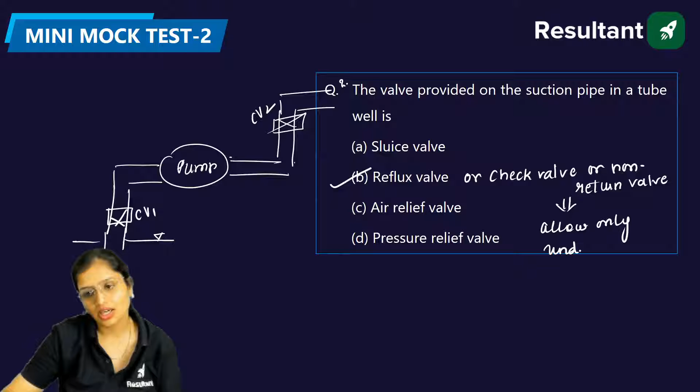So you provided the valve on the suction side. If the same question had the delivery side instead, and they asked about the valve provided on the delivery side, in any pump cases, we still provide a check valve because we don't want the water to move in the backward direction.

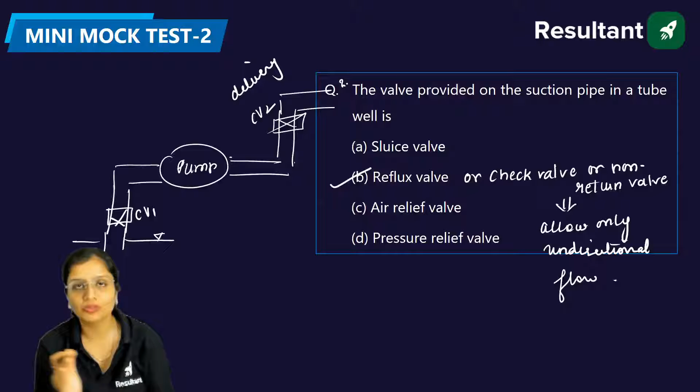Clear? Now question number 3. A scour valve, which you call the drain valve or blow off valve. Where is it provided, guys? Where do you provide it? Where do you provide scour valves? You call it drain valve, you call it blow off valve.

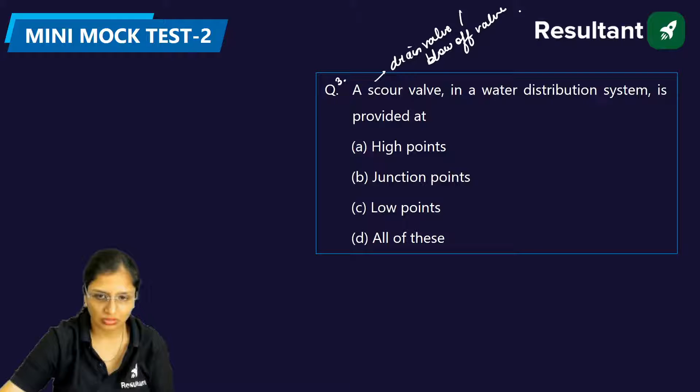Yeah, I'll send it. Send. Actually, I was busy with too many classes. I'll send it. Come on, calculate this.

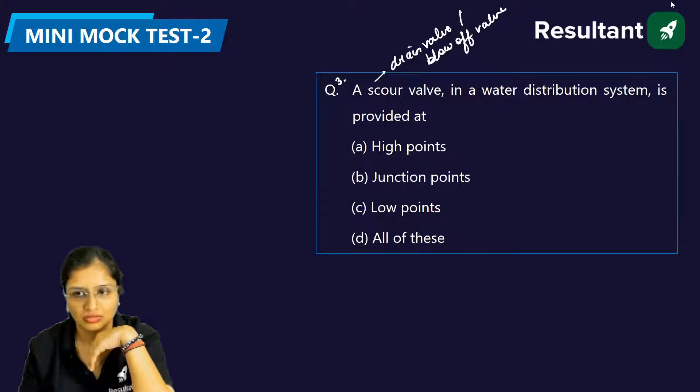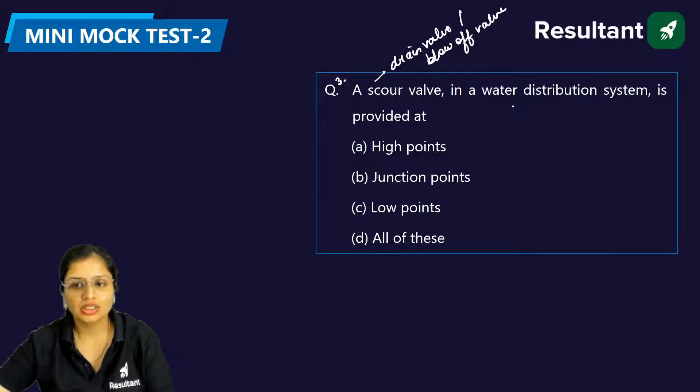A scour valve is provided at the low points of the pipes. Junctions mein kabhi provide nahi karte, you provide it at low points. Why? Because first of all, these are manually operated, and from time to time when cleaning of the pipes is required, you will open these valves. So the water will be flowing under the action of its own weight from both sides, and they will carry the suspended solids. You will open this drain valve, and the water along with the suspended solids will go out of the pipe. So the water carries the suspended solids deposited in the pipe, which is why you place it at the lowermost point.

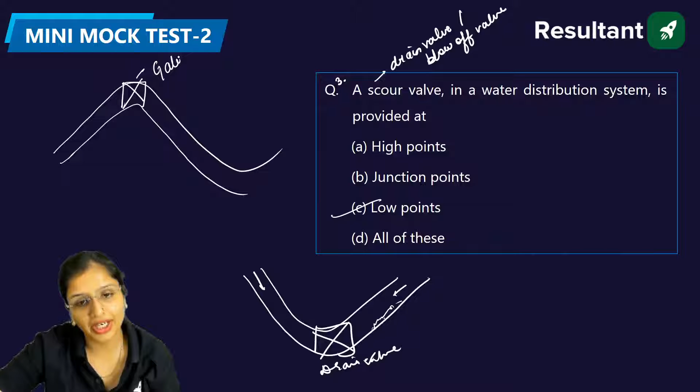So, low points. Now, one more thing about this question, gate valve. If they haven't asked about gate valve, I'm still telling you — you call it gate valve or sluice valve, and it is provided at the summit points. If they ask about gate valve, which is used to regulate the flow of water, you provide it at the summit points. And drain valves, you provide at low points. Clear?

Pakka sure, 100%. 100%. Vishnu, let's check it out.

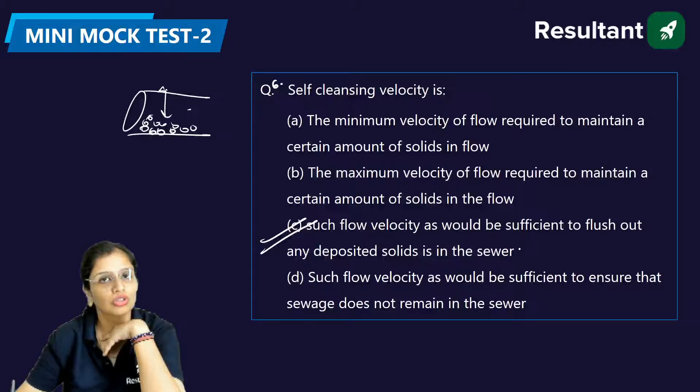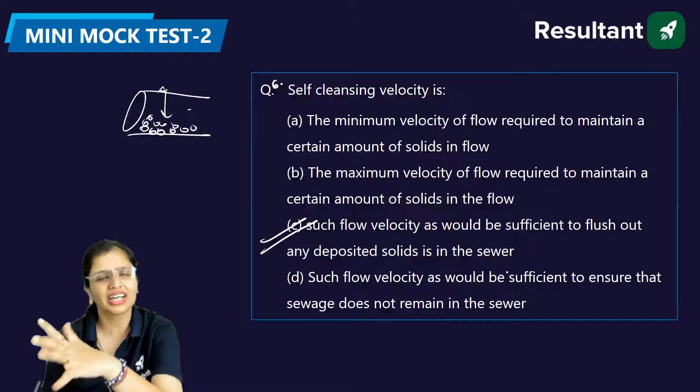So such flow velocity as would be sufficient to flush out - in case any solids have been deposited, it will flush out that solids, meaning remove it. That's why we design sewer for maximum hourly flow and check it for minimum hourly flow, because for minimum hourly flow we make sure that it is equal to generally the self-cleansing velocity.

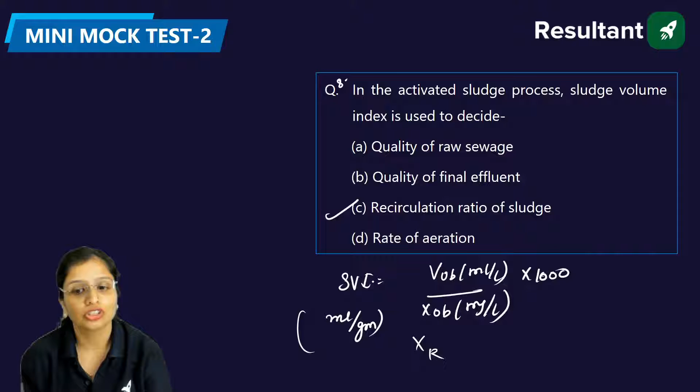By calculating sludge volume index, you will be able to calculate how much recirculated sludge is there, how much useful sludge is there. So the reason for calculating sludge volume index is you will be able to decide the recirculation ratio of sludge.

Question number 9. Activated sludge process - what is activated sludge process?

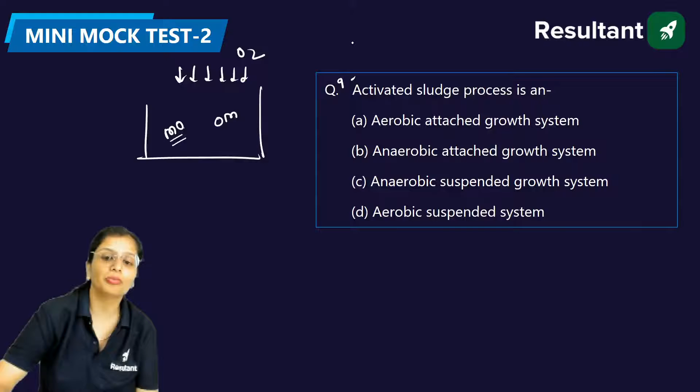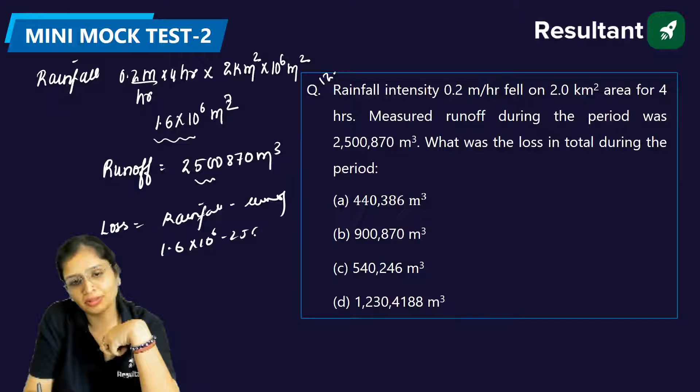If you will subtract, loss is rainfall minus runoff. With calculator I am doing it. So it is coming 1.6 into 10 raised to power 6 minus 2500870. It is coming 900870, but with a negative sign. So they are saying only the numerical value, so numerical value is 900870.

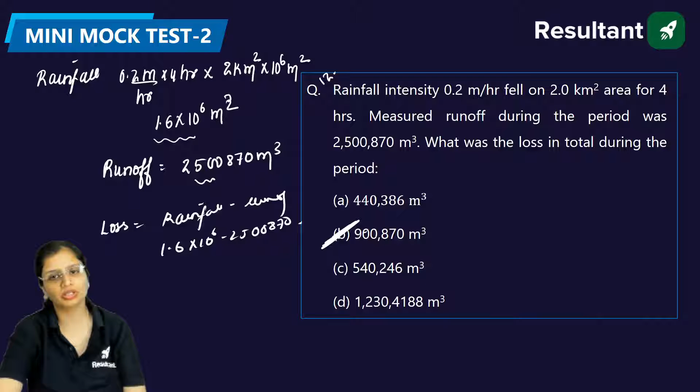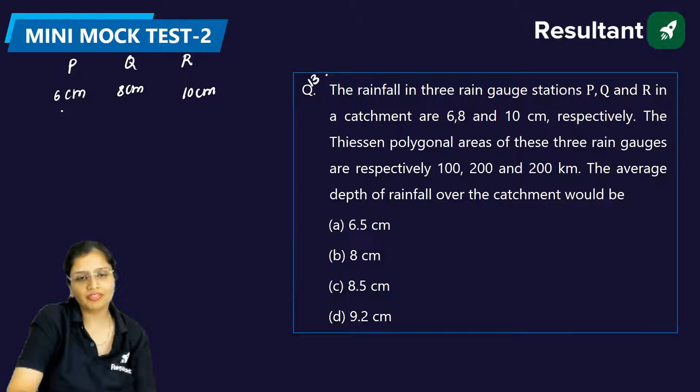Question number 13. The rainfall in 3 rain gauge stations P, Q, R is 6 centimeter, 8 centimeter, 10 centimeter. And the area given is 100 square kilometer, 200 square kilometer and 200 square kilometer. It is asking you the average depth of rainfall over the catchment by Thiessen's polygon. You know Thiessen's polygon is P1A1 plus P2A2 plus P3A3 upon A1 plus A2 plus A3.

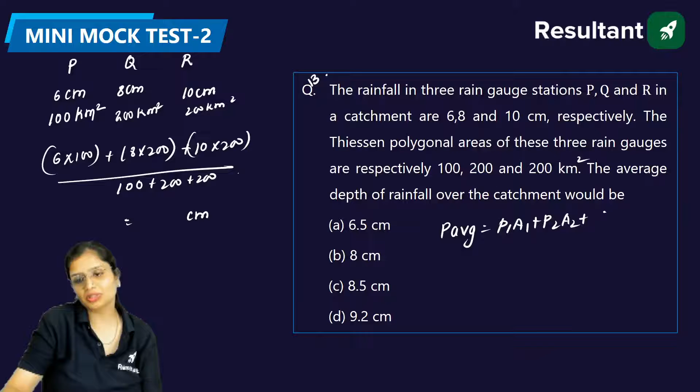Same thing you will do: 6, don't bother about the units, they will get cancelled out. 6 into 100 plus 8 into 200 plus 10 into 200, divided by total area which is 100 plus 200 plus 200. Come on, calculate from here. The formula is average precipitation is P1A1 plus P2A2 plus P3A3 upon A1 plus A2 plus A3. Come on. Yes it will be taking only the value, not the sign. How much is it coming? Solve it and let me know, how much is it coming?

Quick. 8.5 centimeter.

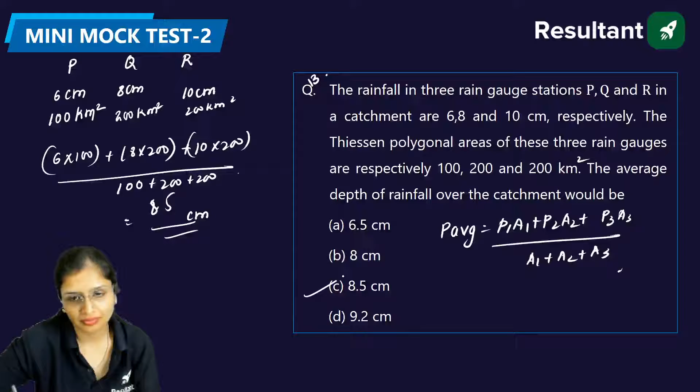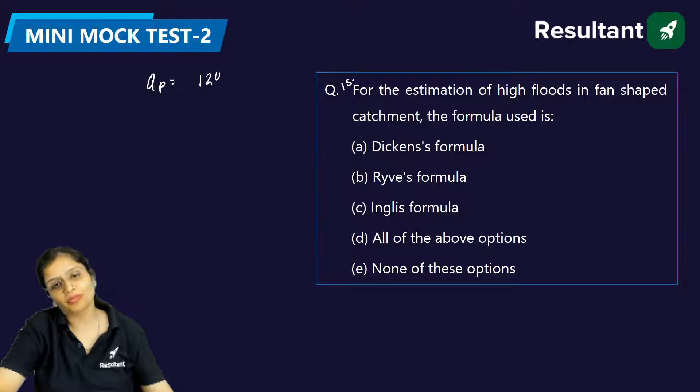Fan-shaped catchment, and which formula will you use? Okay, I'll write the formula. Come on, tell me the name at least. High floods in fan-shaped catchment. The formula I've written, kindly tell me the answer.

What is Dickens' formula, guys? That is C D a to the power 3 by 4. What is Ryve's formula? C R a to the power 2 by 3. This formula I've written for peak discharge is the Inglis formula. If you write it in shortcut, this becomes approximately 12.3 root A. So C is the correct one. In fan-shaped catchments, the formula used is Inglis formula, which I have written.

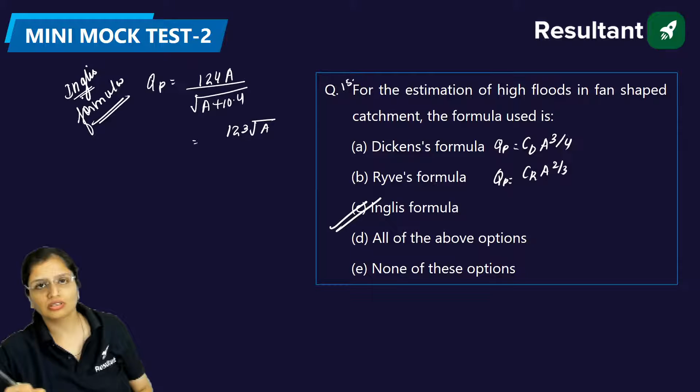Inglis formula. Okay, now question number 16. This is something out of the track, but at least try. Petty's formula: Q is equal to CP into B to the power... this is based on what? It is written wrong in the question, it's not 3/1, this is 5/4, to the power 5/4.

This is based on what? C is constant, M for different areas like humid areas and all, the value is different. P is probable precipitation. And B is the average width of the basin in kilometers. Now this is based on what?

Come on. This formula is based on how much amount of rainfall. P is the probable maximum rainfall, so it depends upon the rainfall and from how much catchment area it is happening. So catchment area, you can call it drainage area, or drainage basin.

So, rainfall and drainage area. Okay, question number 17. The desired length of overtaking zone as per IRC, Indian Road Congress recommendation. Come on. Desirable length. This you might be knowing. Desirable length, this question has been asked a lot of times. This you can answer. Correct: 5 times overtaking sight distance.

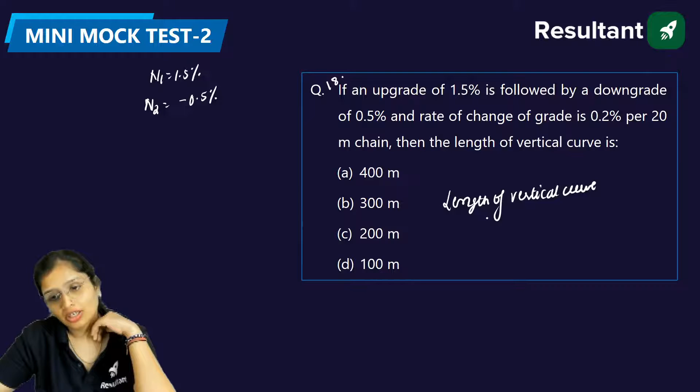Come on. How much? See, length of vertical curve will be given by rate of change of grade into length. How much is rate of change of grade? N1 minus N2, so this will be 1.5 minus minus 0.5, so this will be 2%. Now come on, answer. Rate of change of grade.

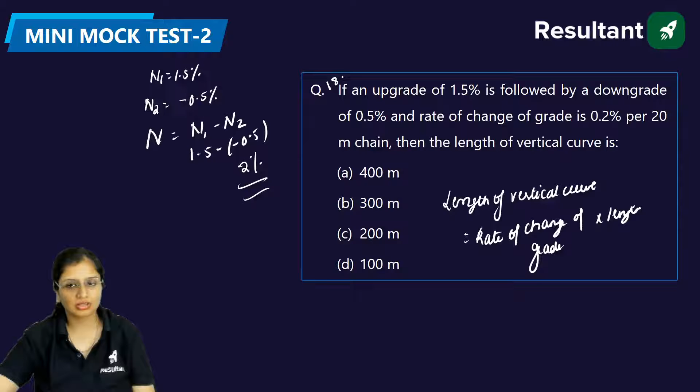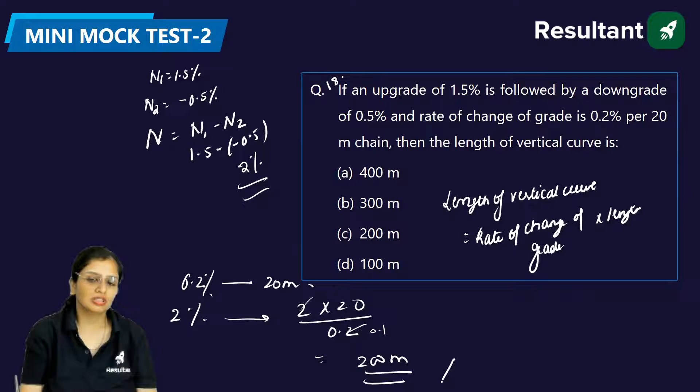Why did you write 0.2? This should be 2. 1.5 plus this is 2%. See, 0.2% for per 20 meter chain. When it is 2%, how much will it be? So 2 into 20 by 0.2. From here you will get how much? This will be 200 meters. Simple question, it doesn't need much thinking. Correct, Vishnu, very good.

Question number 19. What is the extra widening required on a 2-lane pavement? Number of lanes is 2, radius is given as 100 meter, the wheelbase of the design vehicle is 6 meter and the design speed is 64 kilometer per hour. Come on, it is asking you extra widening. Quick: the formula NL square by 2R, this is off-tracking, plus V upon 2.64 root R. Just substitute it and answer. Length of wheelbase given is 6 meter, everything is given, you just have to substitute the values and answer.

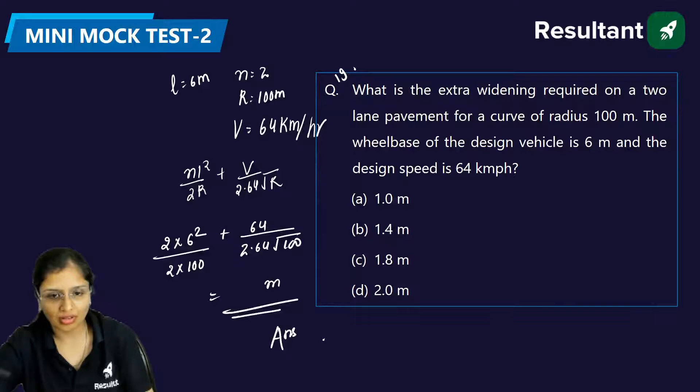Quick. Number of lanes 2, L square 6 square, 2 into 100, plus 64 upon 2.64 root 100. Solve it. Solve it quickly, guys, should I solve it? Let me solve it: 6 square divided by 100, plus 64 divided by 2.64 into 10. This is coming out to be 2.784, so approximately 2 meters. That's what is coming. Just check it once.

But I think I didn't put a bracket on the 6 in this. Just a minute, just a minute. This is in kilometer per hour, so I have to multiply by 0.278, I missed that. 0.278 into 64, divided by 2.64 into 10. This is coming 1.033. So approximately 1 meter.

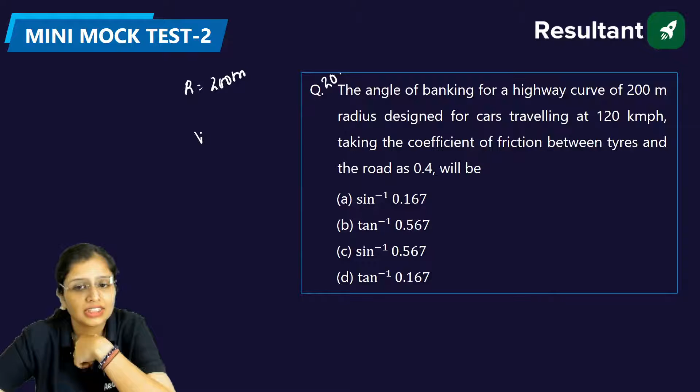Next question. The angle of banking for a highway curve of 200-meter radius designed for a car traveling at a speed of 120 km per hour and coefficient of friction 0.4. So how much will be the angle of banking? Now they have complicated this. This is basically asking you super elevation. By saying angle of banking like this, they are confusing you, but basically they're asking the super elevation.

Come on, answer quick guys.

Vishnu, you have studied the formula in kilometer per hour, so when you do it by kilometer per hour, it's V upon 9.5 root R. That's why you were confused when I wrote V upon 2.64. If you use V upon 9.5 root R, the velocity is in kilometer per hour. But here I converted the velocity into meter per second and did it. That's why I used this formula. If you use V upon 9.5 root R, that is also correct, you will get the same answer.

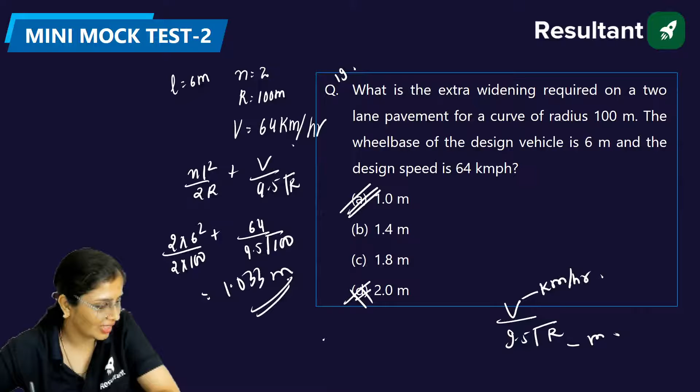NL square by 2R plus V upon 9.5 root R. So this will be 0.36... 1.033. You're getting the same values. Okay, I did it in terms of meter per second, that's why.

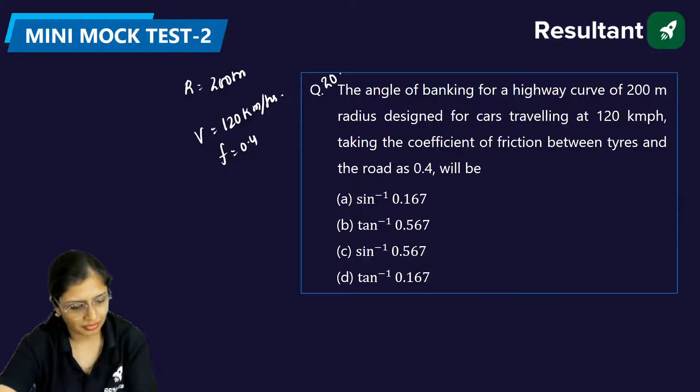Okay, now solve this one. You know E plus F is equal to V square upon 127R. V is 120, R is 200, coefficient of friction is 0.4. Calculate E from here, what will be E? That will be tan theta. Whatever value of E you get, that will be tan theta. Come on, solve it and tell me how much E comes.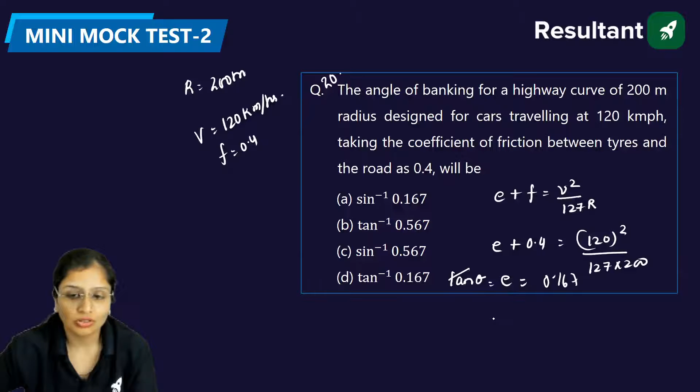Solve it and tell me. Check it out, 0.167 it will come. So theta will become how much? Tan inverse 0.167. Okay fine, I'll do it. First I'll forward the remaining ones.

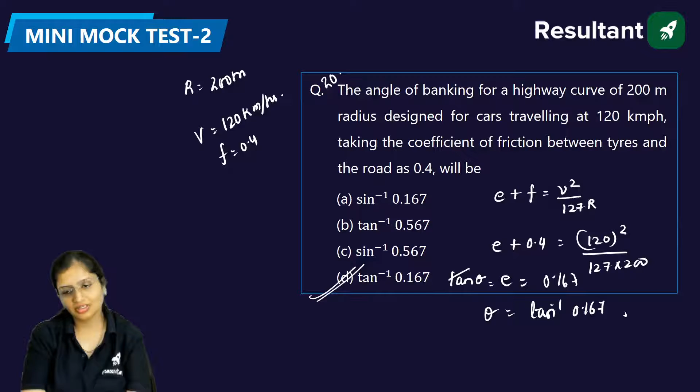Okay, question 21. Cubic parabola is a type of what curve? Cubic parabola, clothoid - what are these? Very good. You're saying 20 is D. Okay, 21 is also D. Cubic parabola is a type of transition curve.

Question number 22. Which of the following is one of the factors influencing the provision of cambers? So cambers which are provided on the sides of roads - what is that factor which is influencing? Not compound curve. Transition curve hota hai na, spiral, cubic parabola. Come on.

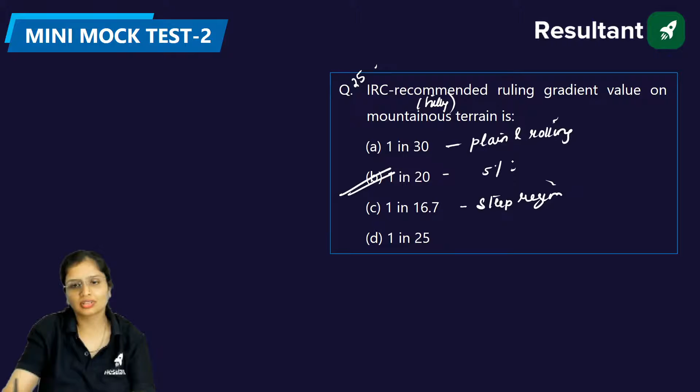This is for plain and rolling terrain. Come on. 1 in 16.7, this is for steep region. This will be for hilly region, that is 5%. This is for hilly regions. Okay.

Question number 26. The minimum value of coefficient of friction along longitudinal and lateral direction. Just like the stopping sight distance reaction time, this coefficient of friction you need to remember. How much? How much?

Kitna? Coefficient of friction along longitudinal direction and lateral direction. Longitudinal, along the length, you have more coefficient of friction as compared to lateral. So it's confirmed that longitudinal will be more as compared to lateral.

Koi baat nahi, I say whatever mistake you have to do, Vishnu, do it here, but don't do it in the examination. Huge mistake we don't say, we say blunder, theek hai, toh gunaah ho gaya. So we don't say huge mistake, generally we use the word blunder. Okay, but whatever mistake is there, do it here, don't do it in the examination. So it's good if you practice here, that gives you confidence. Now you will never ever forget in your life. Since you made a mistake here, now even in the examination under pressure, you will never forget it. That's why these practice sessions are, so that you make mistakes here, but don't do it in the final paper. Correct.

Coefficient of friction longitudinal 0.35. Sometimes with favorite thing only we do like this. No issues. Question number 27.

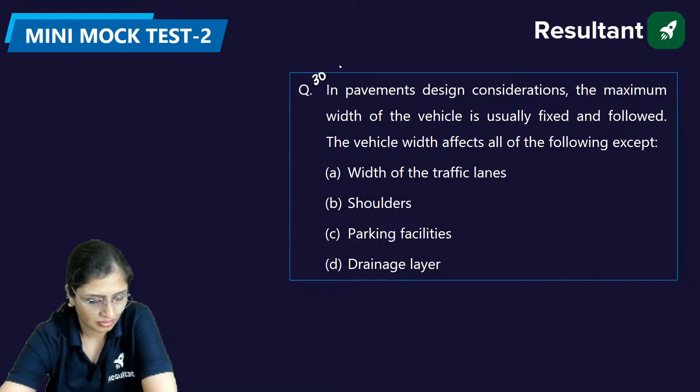Quick guys, last question for today. Quickly solve it and tell me.

Pakka? This is homework.